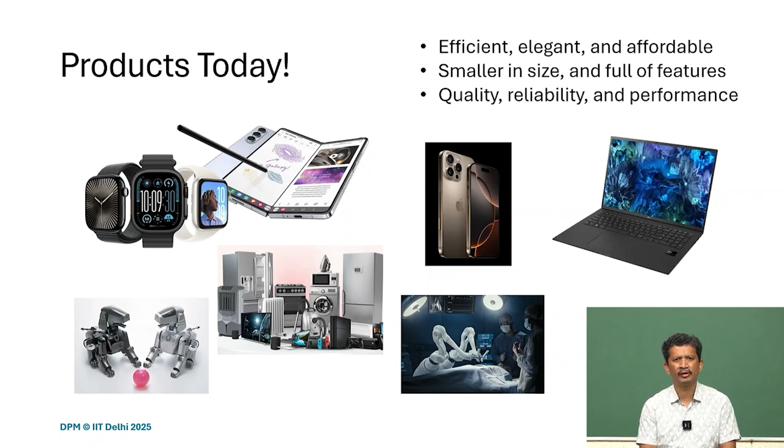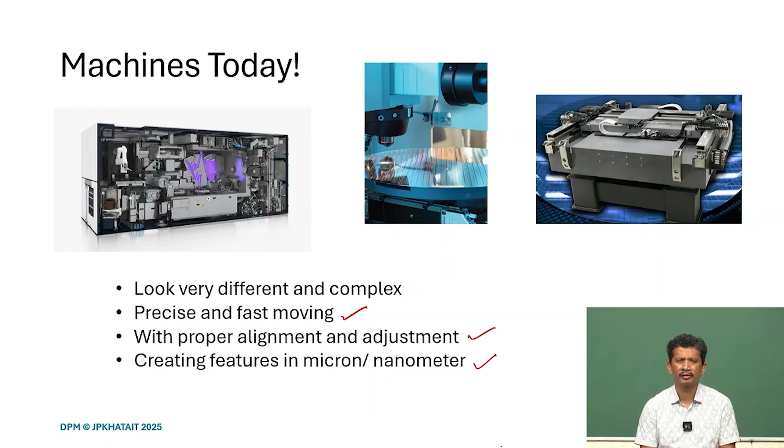At the same time, when we look at the machines today, the systems, the instrumentations which enable us to produce these products, they are very complex, they look very different, they are very precise and fast moving, and they can do alignment and adjustment on the fly. We have enabled creating features in the size of microns or even at the nanometer level, and that's how we are able to get these modern products and modern systems with so many capabilities.

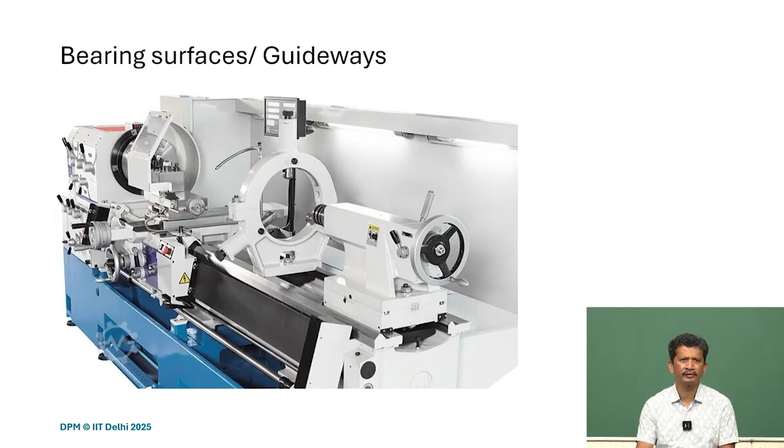One element when we look at all these products or machines that enables us to produce them with higher precision is what we recognize: we cannot eliminate motions. There will be relative motion between different components and modules. Of course, there are different guideways and a lot of bearing surfaces, and if we check or look at those designs, what we realize, for instance, in these machines...

We talk about this design, the Vee and flat, and we also understand how exact constraint design principles, or controlling degrees of freedom, enable us to design this system to achieve higher repeatability, while at the same time avoiding any kind of over constraint.

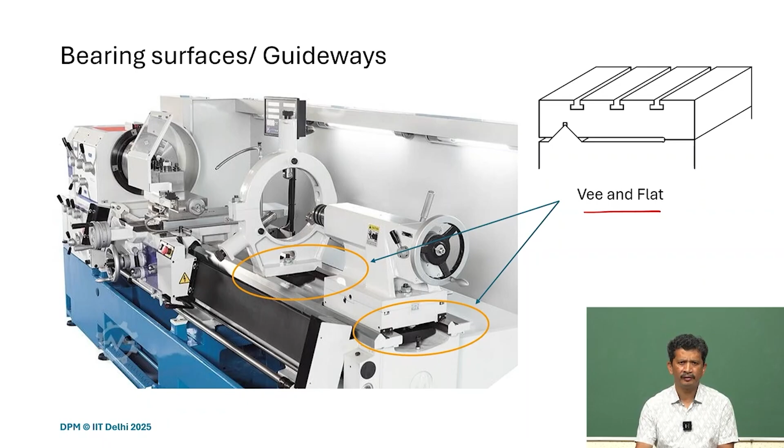So the machine tools, the systems, they have a Vee and flat, and we can recognize them in older machines, especially if they are meant to fabricate or manufacture precision components - these features are easily seen on those machines.

As we move on, we've realized that all modern machines, when going for higher speeds and looking at robotics and automation applications, now have those guides replaced by linear guides. Of course there is sliding motion, but if you look closely at the construction, you realize there are recirculating balls inside - it's just like ball bearings embedded inside the linear guides. So we can get very good speed.

With respect to precision, there is a limitation. Of course it's better than purely sliding bearings or sliding joints, as we can call them, but still there is physical contact, there is friction involved. And as we studied, wherever there is friction involved, no matter how stiff the structure is, there will be an associated virtual play, and that will be the limitation - the positioning uncertainty we get because of the friction and the limited stiffness of the component.

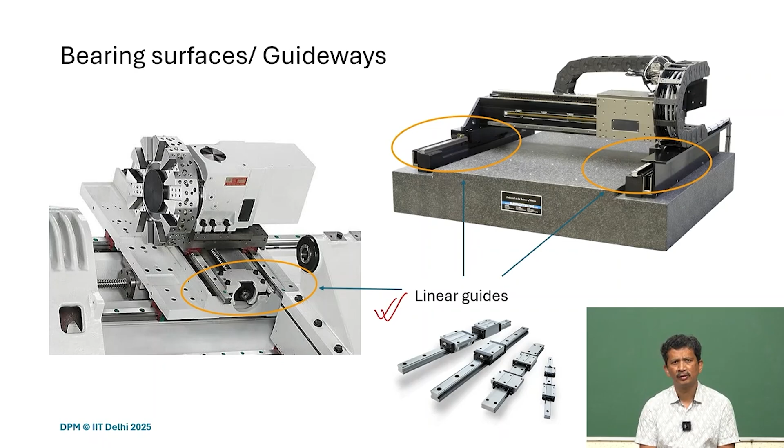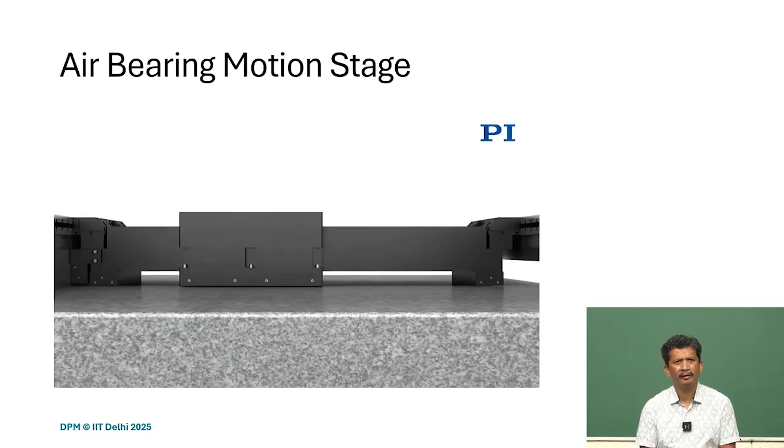So we look at some designs. That's why we are talking about air bearings these days, and we'll cover air bearing linear stages or motion stages. It's a two-axis system, what you can see here, and there are air bearings embedded, and that's how it works. There are orifices, so pressurized air is fed through, and then it passes through the bearing surface.

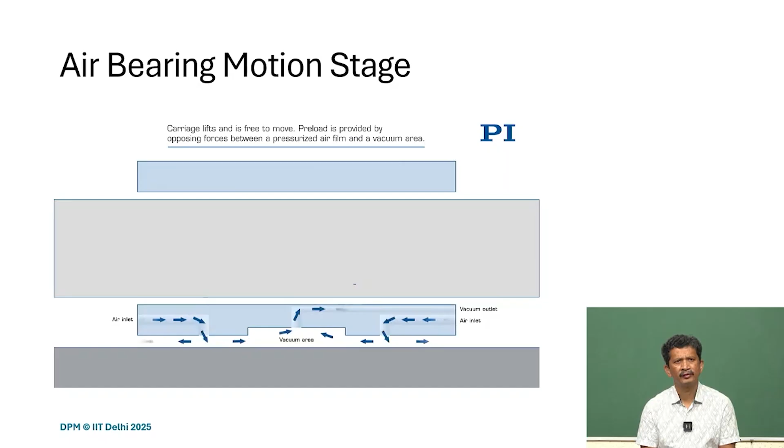At the same time, we can also combine vacuum and pressurized air bearing in one module. So here there is no vacuum.

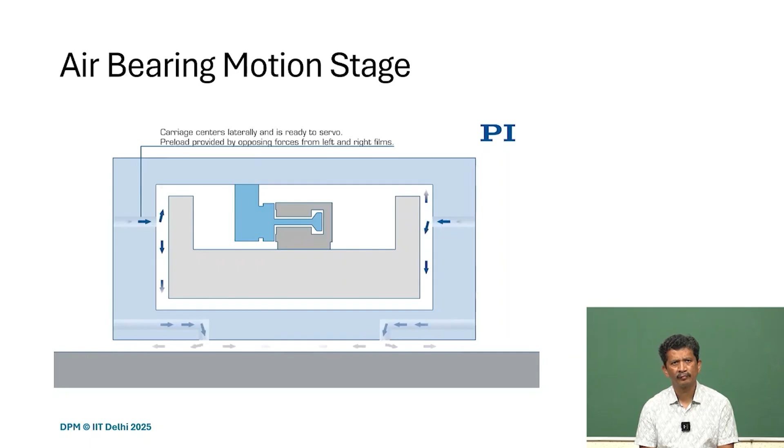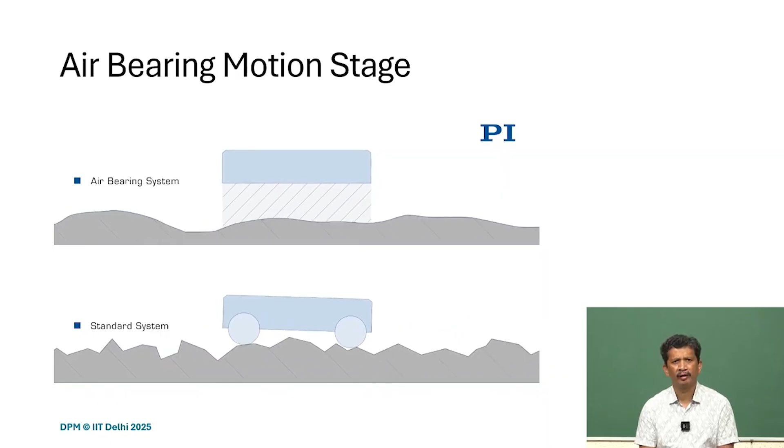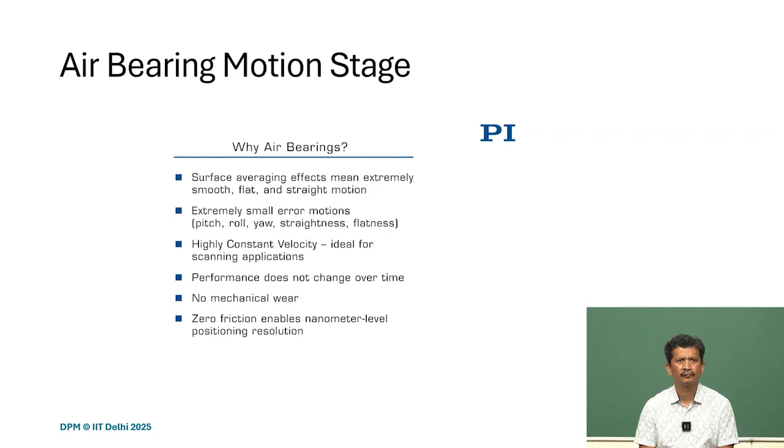What we realize is there is no mechanical contact, and the air film we have is of the order of 5 to 15 microns only. At the same time, since these air bearing systems work on an air bearing film, there is no hard contact, so we get an averaging effect which eliminates errors, and since there is no contact, there is no mechanical wear as well.

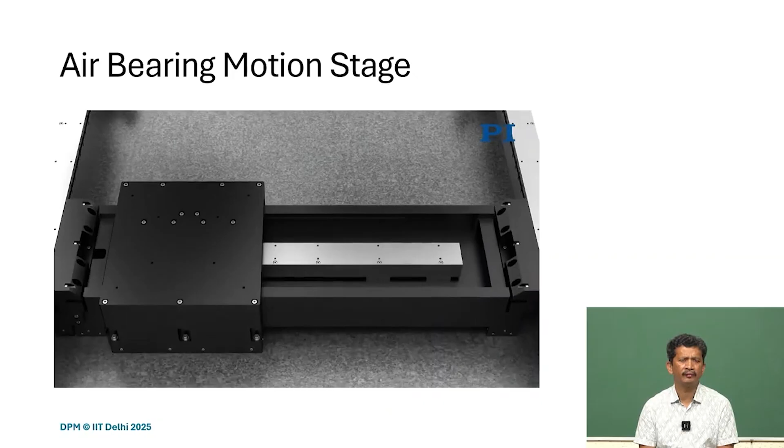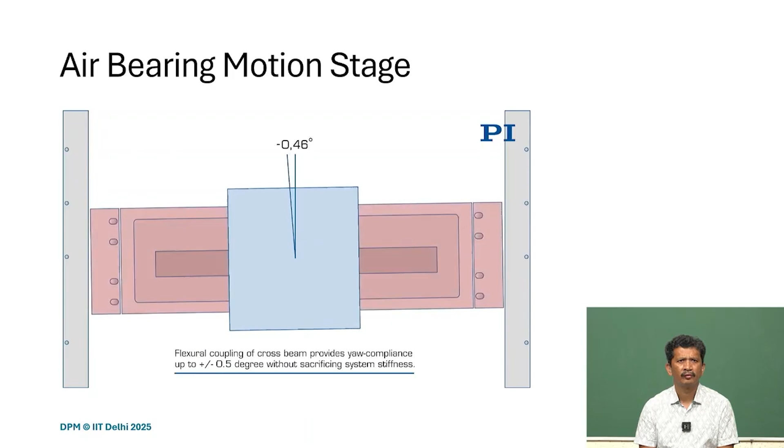For this kind of machine, we also want to have yaw control. For instance, if you have two linear guides on either side with two linear motors, we want to have that control, and therefore we also need flexure bearings at the end so that it can adjust or rotate.

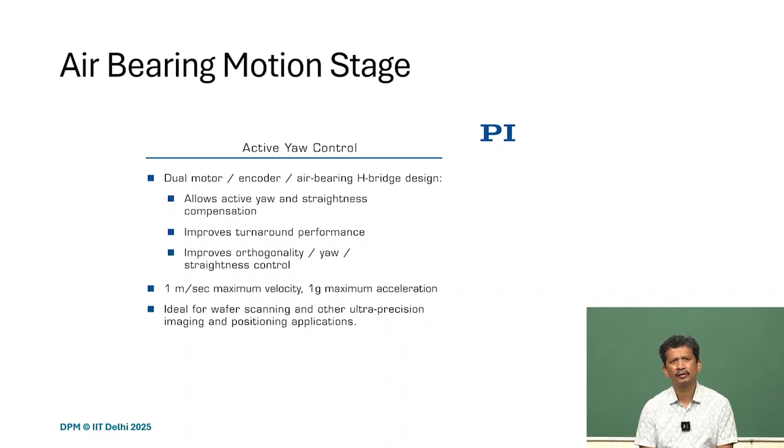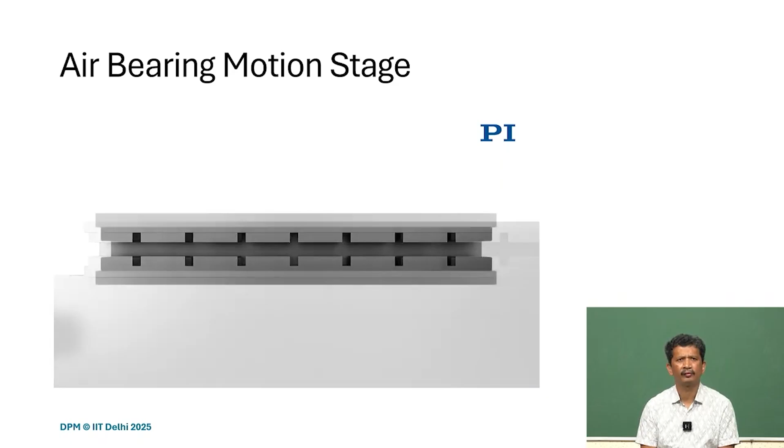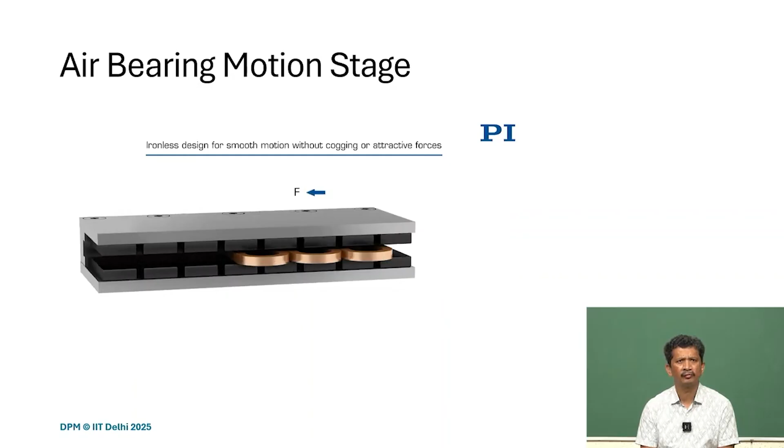There are direct drive linear motors directly embedded on the linear guides. Once energized, the magnets and the coil interact - the magnet will be stationary and the coil, usually lighter, will be with the motion stage and can move freely. So it's a direct drive, with no error associated with transmission, and of course there will be sensors there.

This has to be moved at very high speed but very precisely. What we realize is that this wafer stage has air bearings, so there is no hysteresis involved and it can move very fast. The friction is almost negligible.

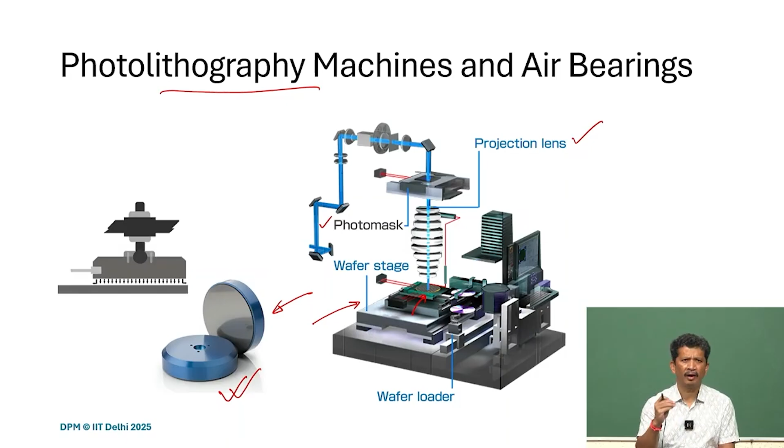So in all these high-end equipments and machines, we realize that air bearings are the key components, used to design different kinds of guides and motion stages so that we can move quickly and precisely. So we'll concentrate more on air bearings, and later we'll talk about how to build different kinds of motion stages or guides using these air bearings.

There are different kinds of air bearings. We can classify it as aerostatic bearings, because the way it works is not due to a dynamic effect but more like a static effect. There is pressurized air fed through the orifices, creating pressure under the bearing surface, and that's how it's able to support the load.

These are different kinds of groups you can see. One good thing is it can be a separate element, but at the same time these kinds of designs can be embedded - we can make different kinds of patterns or grooves on the surface itself and get the air bearing inbuilt.

Another class is porous air bearings, and there is one company making these kinds of porous bearings - New Way Bearings from the USA. But I think there are a lot of companies now trying to develop this kind of porous air bearings.

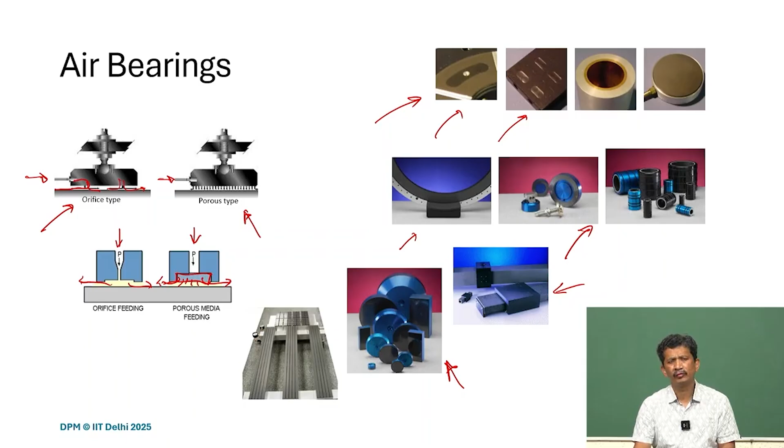So what we realized is there's an air gap, an air film developed, and because of that we are able to get a non-contact bearing surface. But we also need to understand that the air film also supports the load and creates stiffness. We'll be talking about all those characteristics, and there might be some doubt about the application, but once we know the physics and how it works, we realize they are a very good element and can be used for developing any kind of motion stages, not only for precision application, but for other kinds of systems as well.

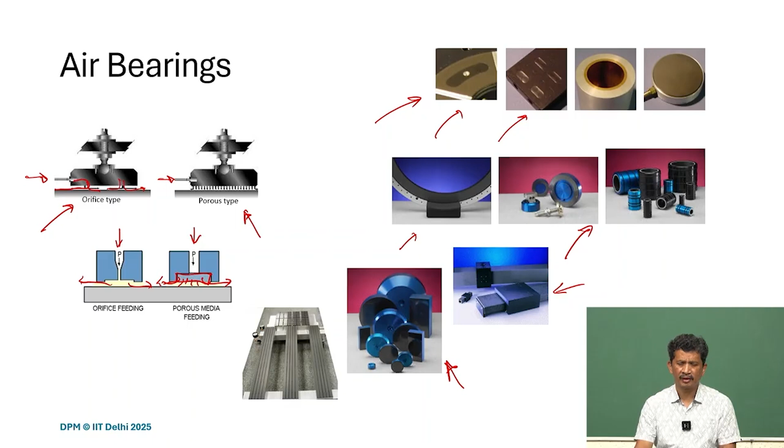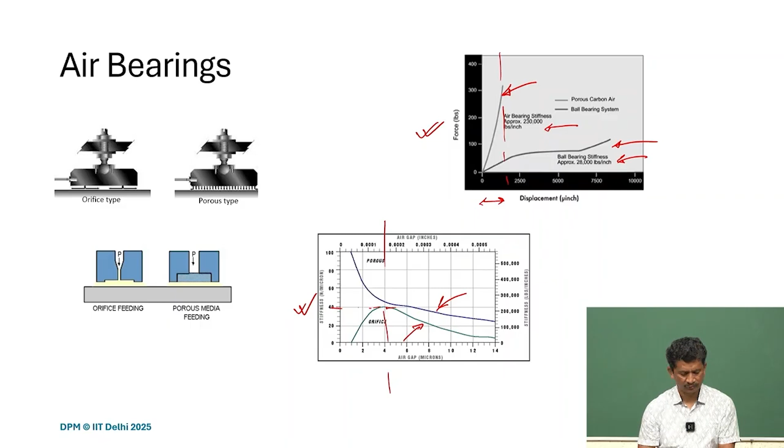Here what we have compared is the porous versus orifice type, and the stiffness, you can see here, is very high and is as good as any contact type of bearing. So how we get it, we'll understand from their characteristic plots.

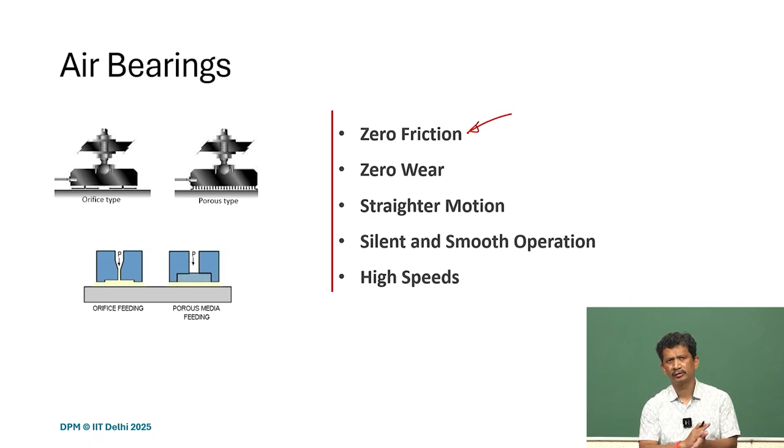And what we realize is since we have an air gap and air film there, it can slide very easily, so there is almost no friction, zero friction. Of course the viscous drag is there, but the viscosity of air is very small, so the effective friction is almost zero. So no friction, no physical contact, zero wear, meaning it's all more or less maintenance free. There will be no wear and tear. Of course, the averaging effect is there, so we can have a straighter motion.

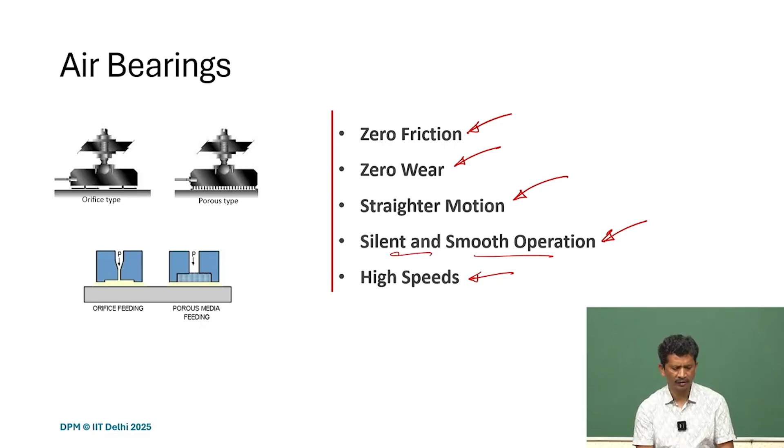Very silent and smooth operation. There is no rubbing and no hard contact, so there will be no noise, and of course we can also achieve very high speeds with this kind of system.

Air bearings, if we look at the history and the development, this is not something very new, and people have been trying for a while. Only thing is it was used for very precise applications and restricted to big labs, or I would say for research only. But as the technology improved and we are able to get different kinds of surfaces, because of the development of new materials, now more and more people are using it.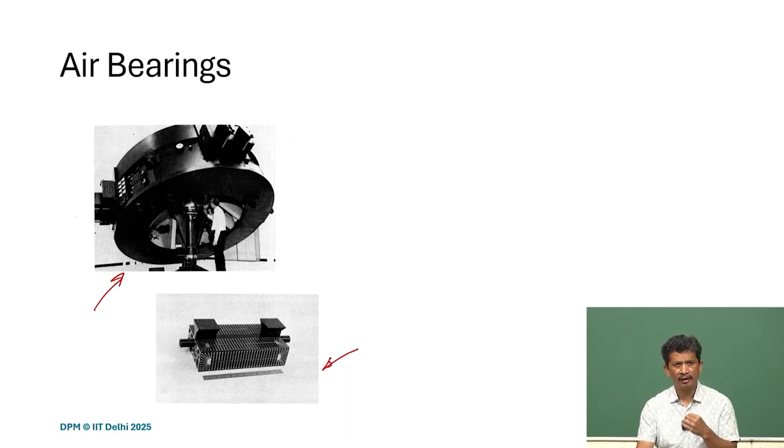If you look at this, it's a humongous and very big system, but it's on air bearings, and it was developed mainly to characterize the Apollo spacecraft for the Apollo mission. What you see here is just a granite block, but the groove pattern is scratched and made on the surface, and you can see that air can be fed through, and then through these channels it will develop the pressure and it can glide. That is the beauty of orifice type bearings, that the entire design can be embedded on the structure itself.

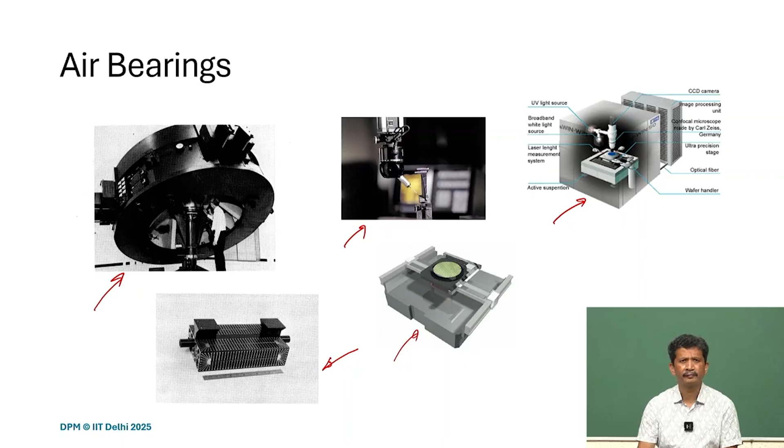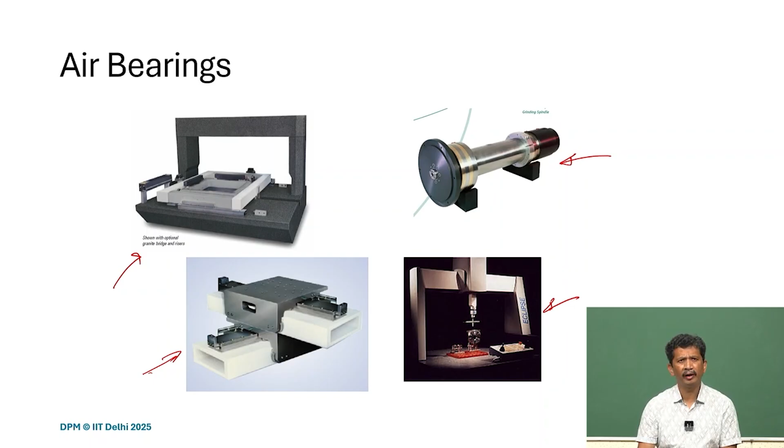These days any kind of CMM machines you see, or for the semiconductor industry, for wafer handling, for any kind of precision application, air bearings are a must. So the stages we can talk about: the gantry type, the XY stages, the coordinate measuring machines, the spindles - they are all on air bearings.

When we now look at the applications and use of these air bearing stages, what we realize is that modern systems, modern machines cannot run without these air bearings. Name it coordinate measuring machines - now in most design houses or manufacturing units, they have these units so that they can measure, qualify, characterize and do the measurements precisely.

For making flat panel displays, display systems are everywhere now, used for displays, for TVs, for computers. So it's everywhere, and the manufacturing, the yield, the kind of things required is again very high.

The semiconductor industry - lithography, wafer inspection - these systems required for manufacturing chips need automation and robotics applications. We are now looking for very high precision applications, and we don't want to compromise on the yield. Therefore, we can see these air bearing stages being used these days.

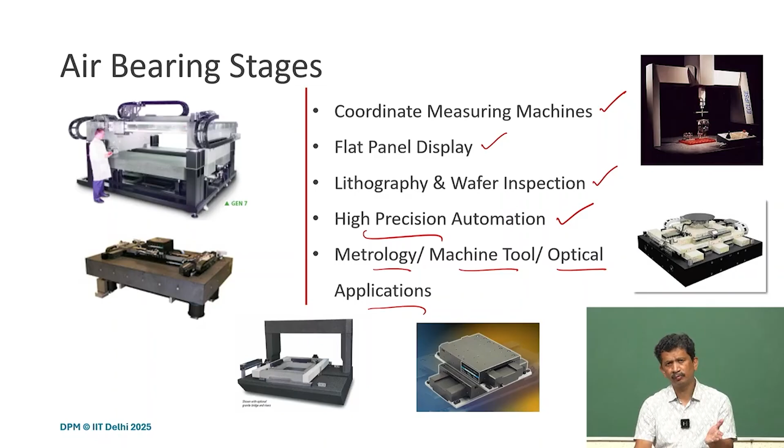Metrology, machine tools, any kind of optical applications - it's everywhere. So I think knowing these elements, the basis of how to design these air bearing stages using individual components, and understanding the working principle of these air bearings will lead us to design these kinds of systems for our own applications and to support the industries here.

So we can see that - this is a Nelson Air here, from their website. What we can see is that for any kind of motion you want to have, you can get this kind of elements - for instance, planar XY and rotary motions. Here you even have journal bearings, air bushings.

You can have a rectangular air bearing as well, which can be embedded on all the sides so it can slide easily. In different arrangements we can get dovetail air bearings. For rotary table applications, where you want only rotary motion with very high axial load, we can create that kind of interface. There are also spherical air bearings or even spindles.

In all these applications, what we see is that there is no direct contact, no physical contact between the moving parts - they are floating. Since there is no friction, we can eliminate maintenance issues and wear and tear, the operation is very quiet, and at the same time the precision level is very high.

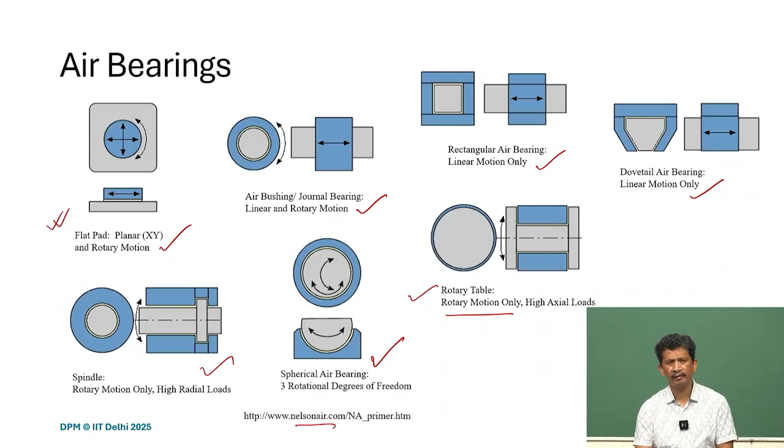So we need to understand how it works, so that we can understand and try to use these elements for our own applications.

This is some work I did while working in Singapore. What we did is, for an orifice type bearing, try to understand how it works, the physics of it, and then try to define the design guidelines.

Of course it has been used, but very little literature is available in the open domain - mostly it was owned by the companies, which is good for their commercial interests, as they don't want people to know. But at the same time, academia and research institutes want to develop this capability so that more people can use it, and the adoption of technology can be widespread so everybody should be able to use it. So the purpose was to understand this.

What are the various parameters, and how the different mechanical properties and mechanical behavior depend on certain parameters. Orifice type air bearings are very easy to use and easy to understand as well.

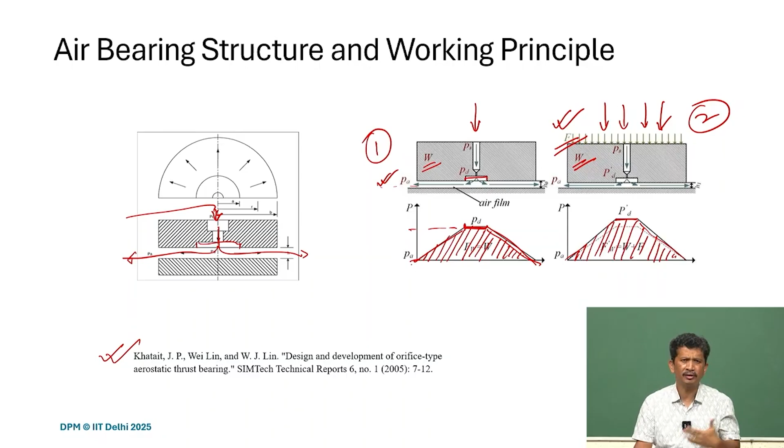Now, the question is how much it can handle, and one can also argue that if there is a very large force applied, maybe it will crush. So, that's something we wanted to learn and understand, and therefore we carried out this study.

What we also need to understand is what is the working range, what is the air gap we are talking about in these kind of systems. So, it's just a comparison here. Typical bearing clearance and tolerance versus the human hair, this big black circle. If this is the size of human hair, the diameter is of the order of 70-80 micron. This is the human cell, the green one, 20 micron. The finer dust particle we are talking about is 4 micron, that is the size.

So now this gap is of the order of 5 to 20 micron. But to be very precise, and to work with these porous air pads or porous air bearings, it will be of the order of 4 to 5 micron. So, we are working in this range, the 5 micron range, not even 20 micron. So, if we are working in that range, that is the gap we are talking about.

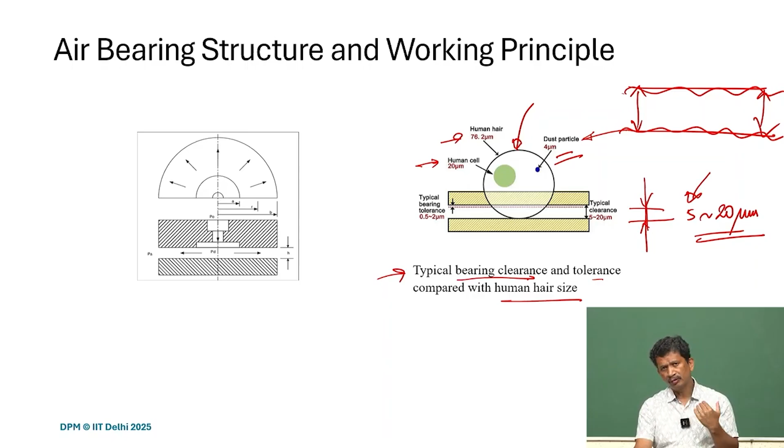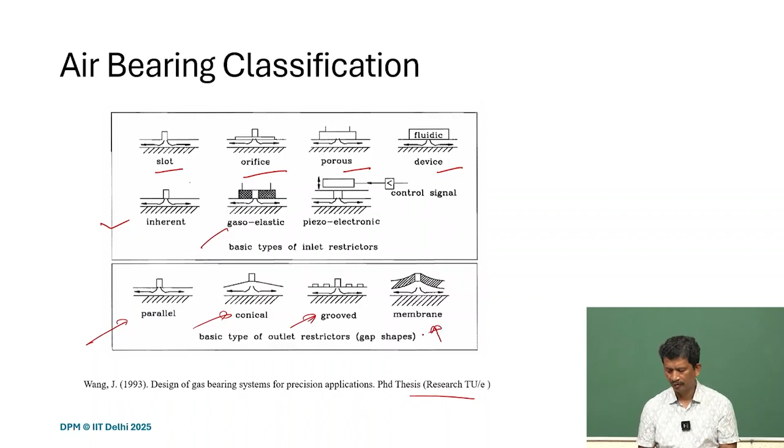We can also see that compared to what we use on daily basis in manufacturing shops or machine tools, we can mimic those kinds of movement with air bearing counterparts - like externally pressurized bearings. Here we have pressurized air fed, but it can be self-acting because of the dynamics we create, just like a journal bearing that's tilted. Because of the movement, pressure is created and we can support the load. So it can be flat, annular, journal, even conical, spherical, and even compliant.

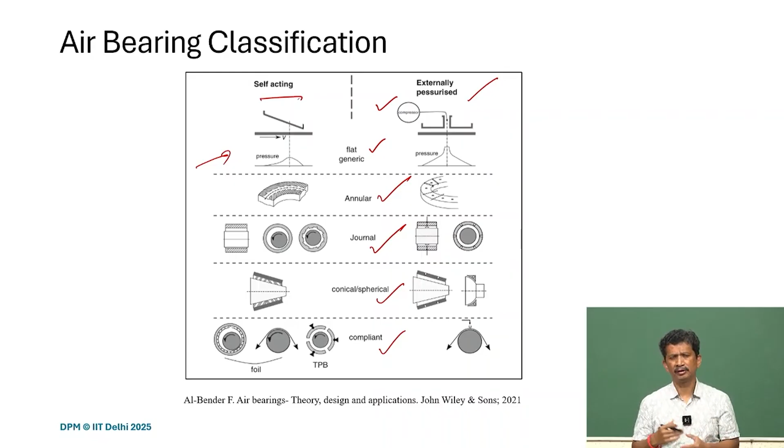So we can classify these, and depending on the application it can be redesigned and we can get different configurations.

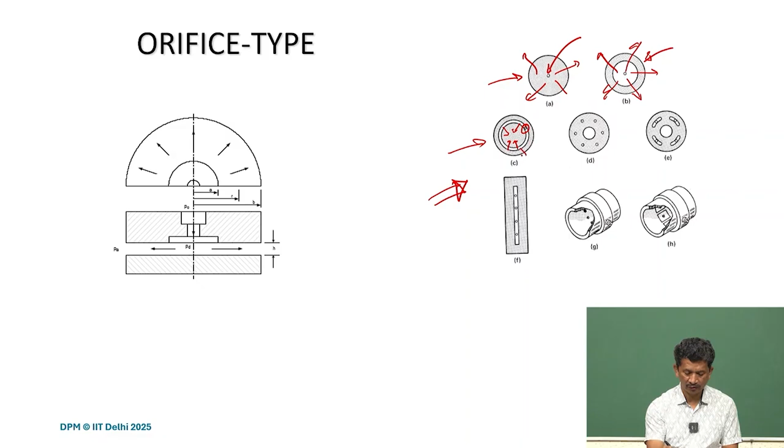There are annular types also, so it's not fed at the center but in the annulus on the side, and then you have a groove pattern. It flows inside and it flows out also. So there's an annular type and an annular groove - air is fed through a hole to the groove, and from the groove it flows through the bearing surface. We can have a combination - central pocket, and then orifices, annular and central.

It can have a rectangular shape also - we can put these on the sides, on the surfaces. So it doesn't necessarily have to be circular, it can be rectangular, but it can also be used for rotary application, for journal application. Similar kinds of orifices and grooves or pockets can be designed and analyzed.

There is a lot of freedom, and the designer has a choice of what kind of elements, what kind of patterns to use, so that we can maximize performance. Here we might be looking at two characteristics: one is the load capacity, the bearing load capacity, and the stiffness without crushing. What is the maximum stiffness we can achieve? What is the bearing load it can take? I think that is the key criteria while designing this kind of system.

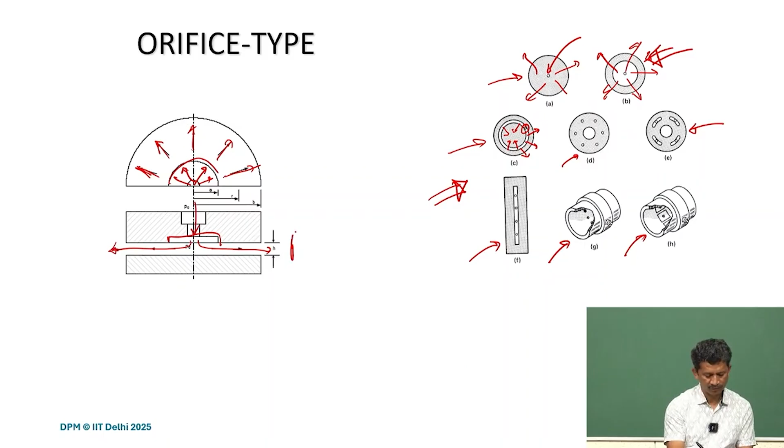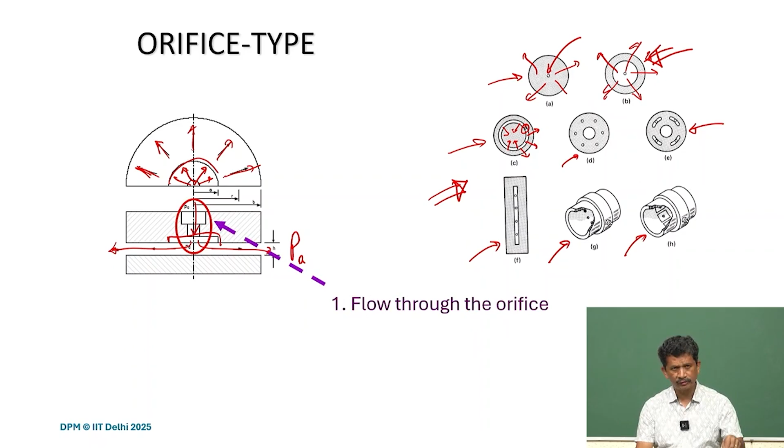So what we did is simply take this case, the orifice type with the central pocket. You see there is a pocket here, so air is passed through - first it comes here, and then it passes through the bearing surface, out to atmospheric pressure, and we just learned how it supports the load. There is one restriction here, flow through the orifice, and another which is flow through the bearing surfaces. So there are restrictions on the flow, and this is how it works, building up the pressure so we get a pressure distribution over the bearing surface area, and that's how it supports the load.

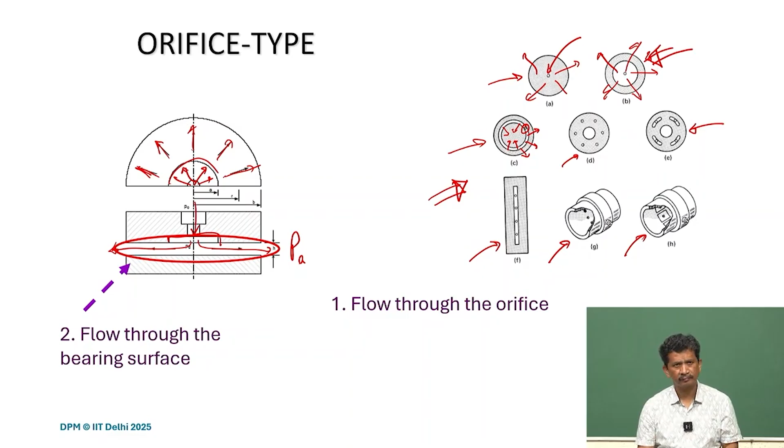When there is any fluctuation in the load, any dynamic load acting, how these restrictors play a role - I think that is key to understanding the working principle of these air bearings. We'll try to understand this part in detail, and also understand how we calculate the load bearing capacity and how the stiffness changes.

This is a very basic element, but there are a lot of developments and designs that can be proposed and made. We can design these on the bearing surface itself, and we can get things lifted, with no contact when things are moving. So there are no contact bearings, no friction, zero friction, so maintenance free, no backlash associated with friction and stiction. Since there's no friction, there is no hysteresis, and therefore it's easy to achieve higher precision and repeatability.

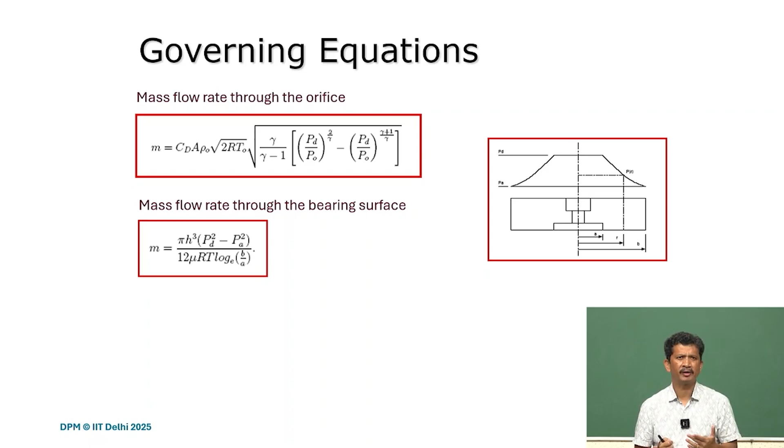So we'll continue, and we'll stop here today. Thank you.